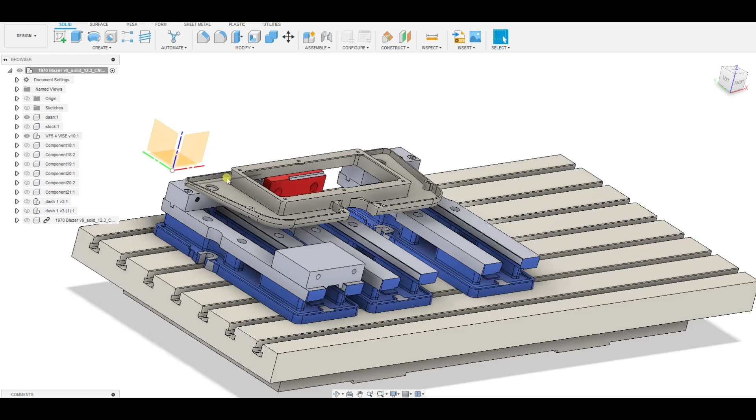Okay, so here we have our C10 dashboard. This is going to be made for the billet version of Reversion Raceworks C10 dashboard that they normally 3D print. So we're going to go through some basic stuff on how I have it fixtured and some of the methods for tooling and operations for cutting this out.

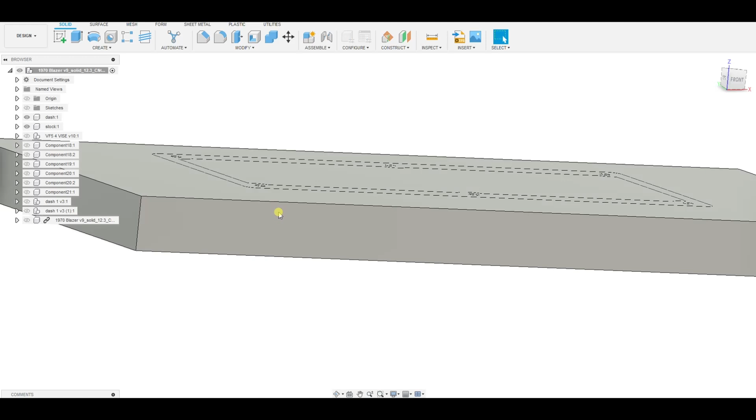For the first operation, obviously here I have it flipped. But you can see here, I have a couple of variations because it actually made it easier to machine, and I'll go over that. But let's get the basic setup out of the way. Stock, 1.5" by 10 by 23 inches is the raw stock, and I have the model positioned, I think it's about 40 thou underneath the surface there. We have just enough raw material to make this work without going to a bigger size.

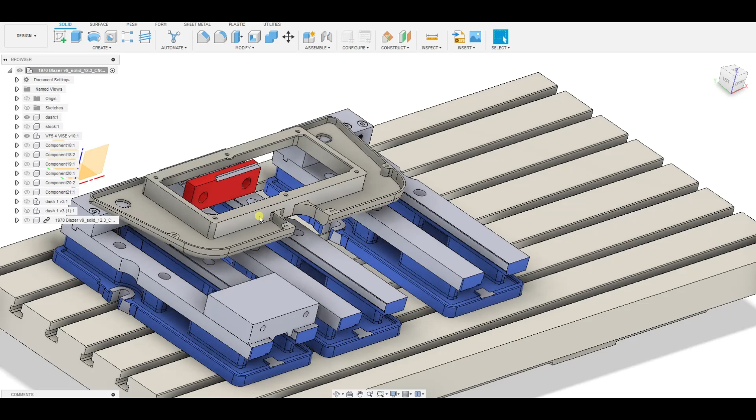For first operation, I'm actually going to be machining out this end first. And the reason I do that is because then I can grab the backside to where the Holley dash sits in. Now, if you don't know, this C10 dash is to hold a Holley 12.3-inch Pro dash. That's what it's designed for. And you have your lights, I believe, lights and wiper controls, factory control locations there. So if you don't know, it is for a Holley Pro dash.

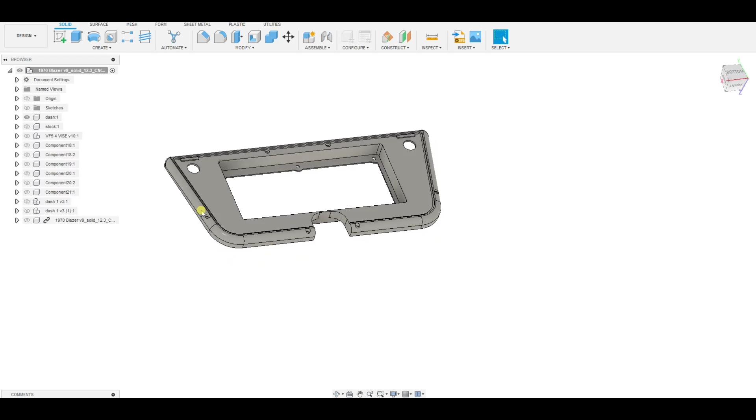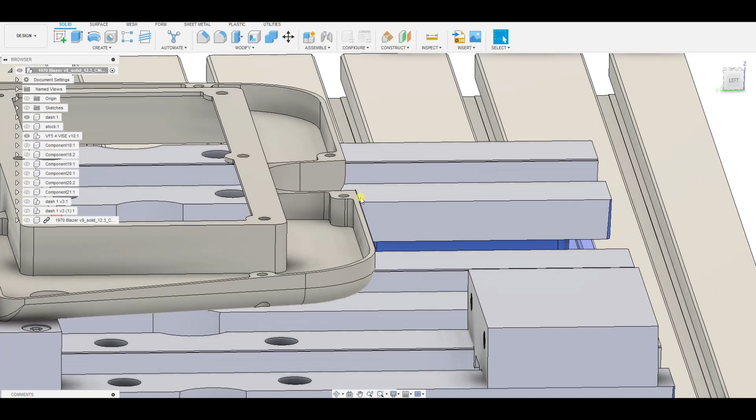As you'll notice, the profile, the angle here. In a 3-axis machine, it is kind of a large part. It was difficult to achieve that to a level that is acceptable. And of course, everybody's interpretation of acceptable varies, right? However, this part specifically is going against the OEM dash part. I think it's a 2-piece dash for these trucks. But anyway.

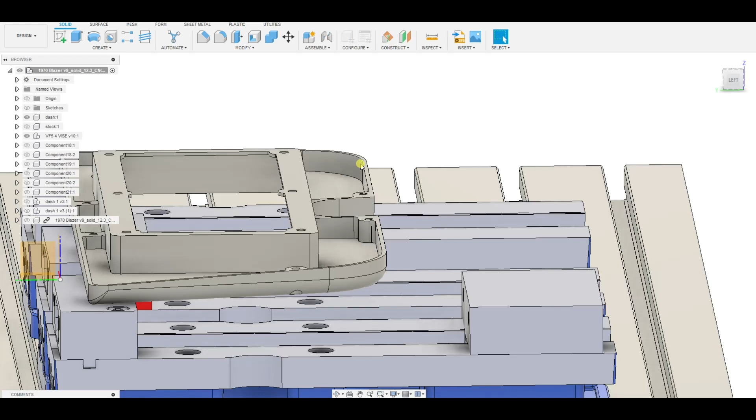And I'll show you what I did there. It was actually kind of like a scallop with a ball end mill. And it was the easiest way to achieve a consistent flatness, if you will, or consistency for it meeting up against the OEM part of the truck dash. You could see these are on an angle here. So it was a little difficult to get into that corner, but I managed to achieve that. And again, a lot of this stuff isn't going to be seen.

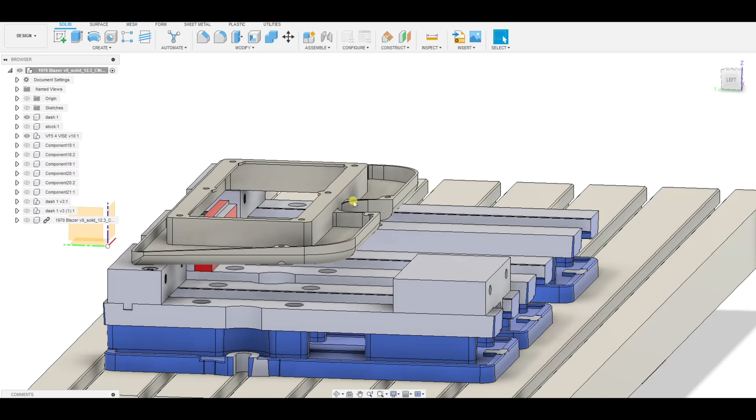Being a billet dash, there should be steps taken to make every area, as a CNC machinist, as best as possible with what you're given. And it is difficult, but it is achievable. And obviously, to have something that's at an angle tighter than 90 degrees, it's just really not going to happen for a 3-axis machine. And I would imagine probably a little difficult on a 4-axis. You're really not going to get in there.

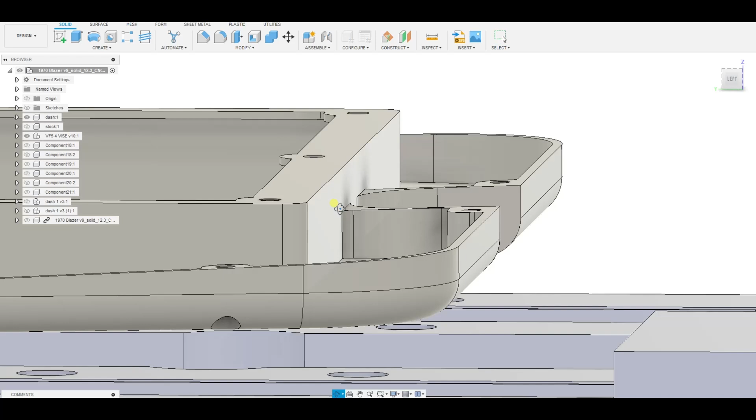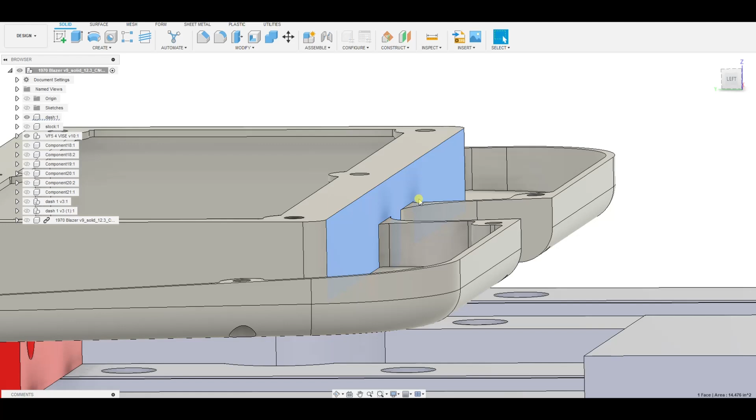Obviously, the best way to do this is a radius. I assume that feature is the way it is from this surface to this surface here. But anyway, I did achieve that just by doing steps to a point, which again I'll get into, by running a contour feature. And I can't say for certain what it left, but it's not that noticeable. And again, this feature is hidden. You can't see this. This is the back side of the dash.

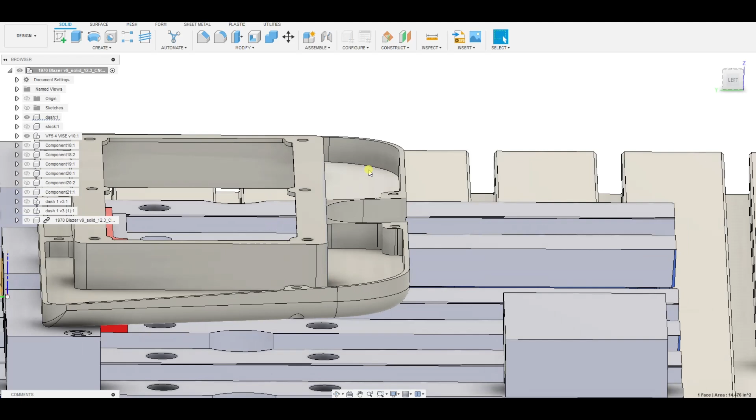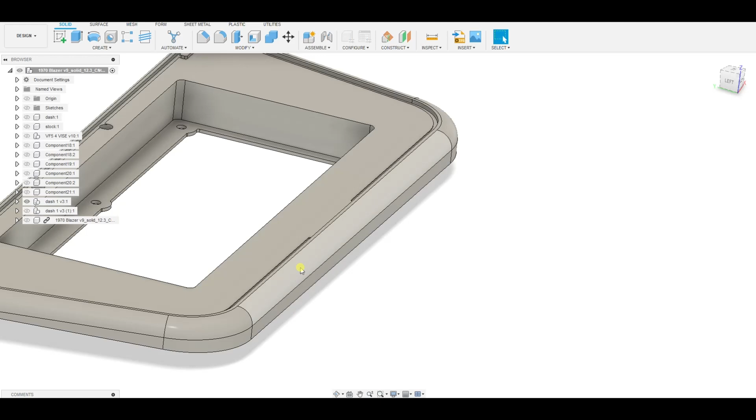So real quick, I wanted to go over the different versions I have of this dash and the reasons why. Here you can see I eliminated the holes here and I eliminated the steering column cutout there. And I did that to make the features stand out a whole lot easier to be able to machine this surface. Now, in a previous video, I had talked about ball end mills and corner radius end mills to achieve this.

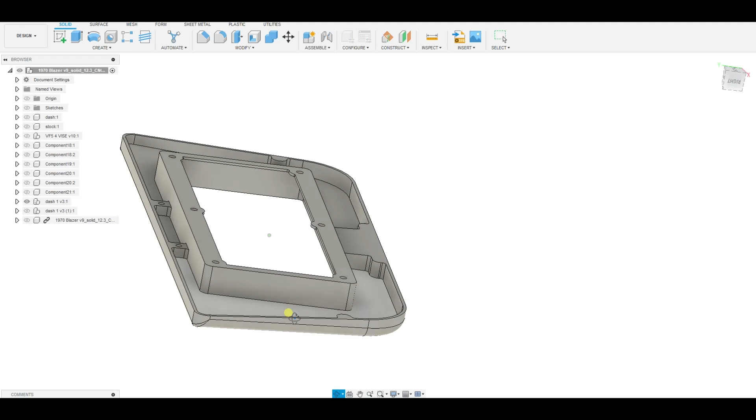So what you're going to see here is the actual machining of this whole top feature here. I do have some basic B-roll of machining this side. Not really the focus of it, but you'll see every bit of this machining, and then I'm going to step back in and we'll focus on machining these surfaces here, which are kind of difficult.

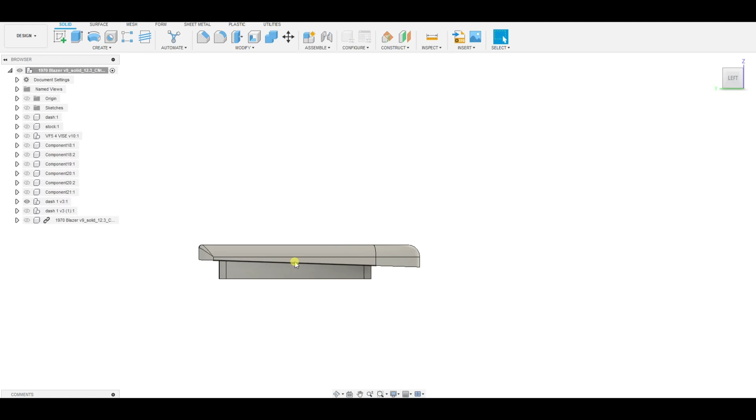But the face of this dash is parallel to here. You just have this angle here. I forgot what that is. I think it's 1.8 degrees, looks like 2 degrees.

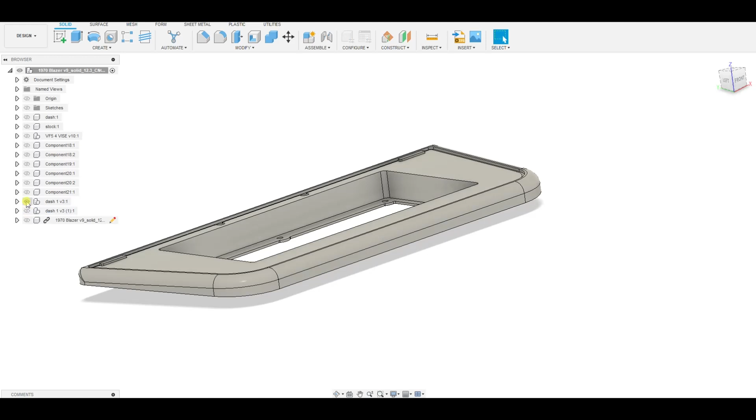Okay, so let me see what this other dash is. I forgot what this one was. Okay, this was just a version where there's no holes for the headlight and the wiper switches. So we got that. So let's go back up to this variation of the dash, and we'll go over to the manufacture space here.

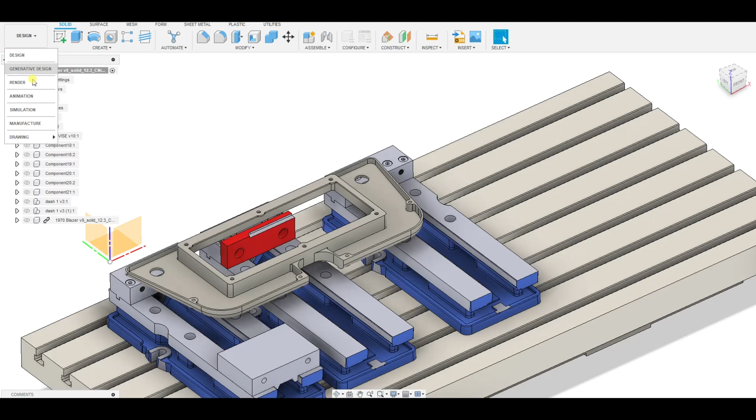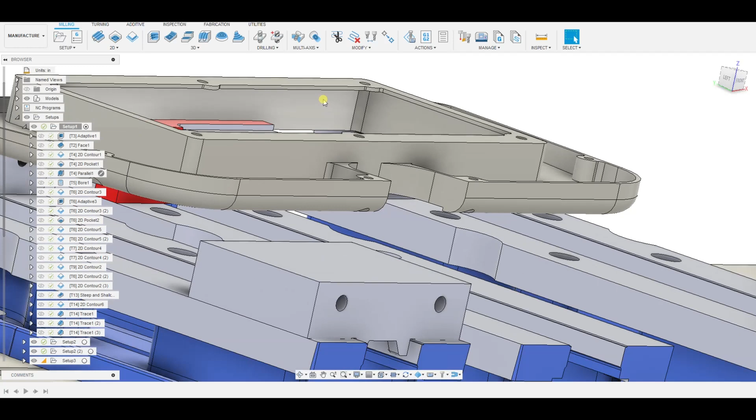So here for our setup one, we're doing an adaptive, obviously. We're roughing all the way down. And what you'll notice too is in this part, it is stepped back pretty significantly.

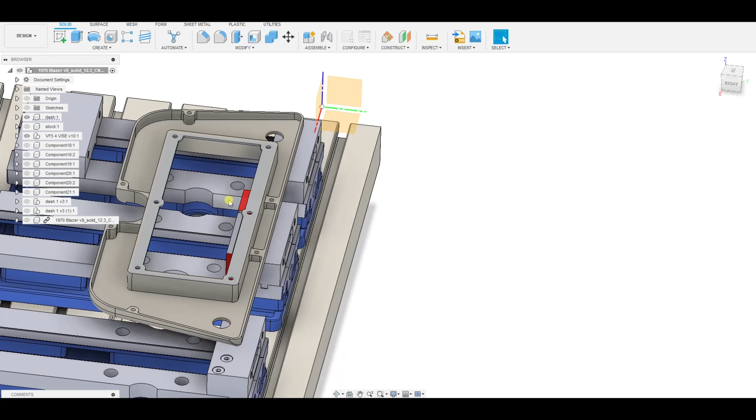So you have this ledge here for the Holley dash to sit on. Well, when we're machining it in this orientation, you can't get into there. That benefits us when we go to flip this part over and grab it in between this surface and this surface here. When we grab it in between those surfaces, we have a whole lot more strength.

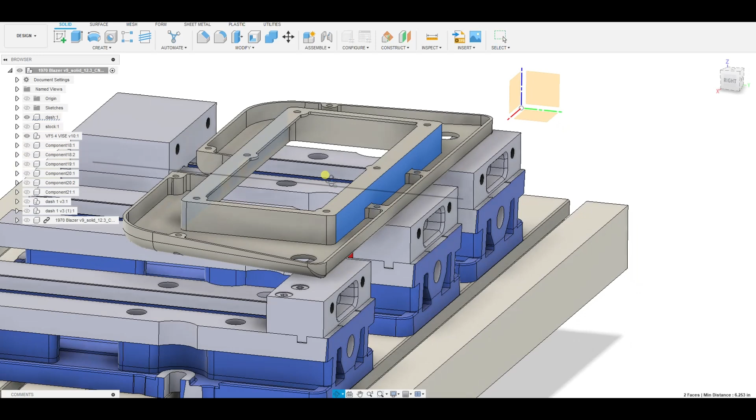One of the last features is to machine the inside of this pocket when this whole part is flipped. When we go to machine that, we very slowly walk down it, and we were careful to check the torque on the vise so that we're not crushing that part.

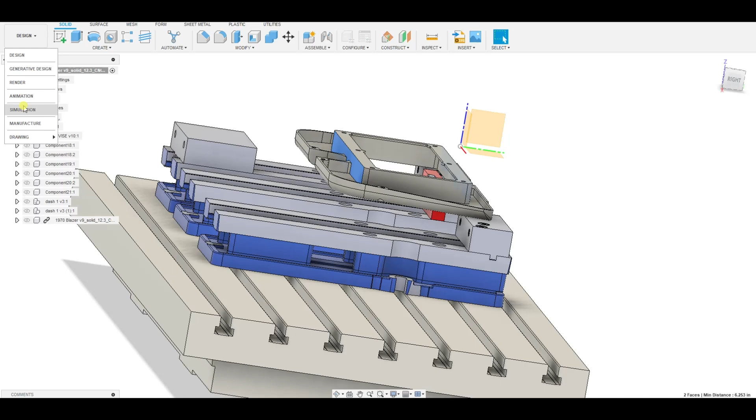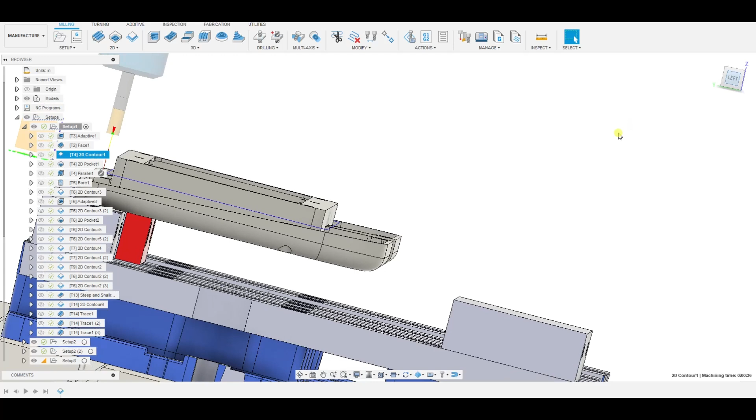Let's go back over to the manufacture space. All right, we have a general face mill, 45-degree shell mill. I'm coming around here, looks like I'm doing a pass here. Now when we run this pass, you can see that's not the final pass for this feature.

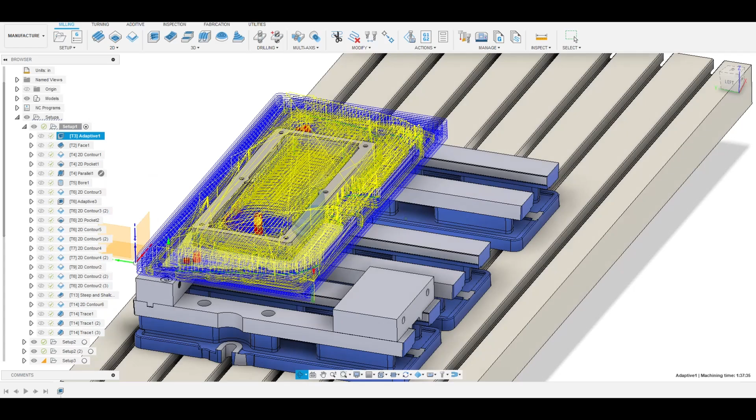So now we're getting into a pocket. Our tool 3 here is our 1/2-inch 4 flute from our Maritool catalog, and that is just eating chips. Our face, like I said, is a shell mill, and then our number 4 tool is our 3/8 3 flute, kind of a finishing / medium roughing tool, and we're finishing the pocket in here.

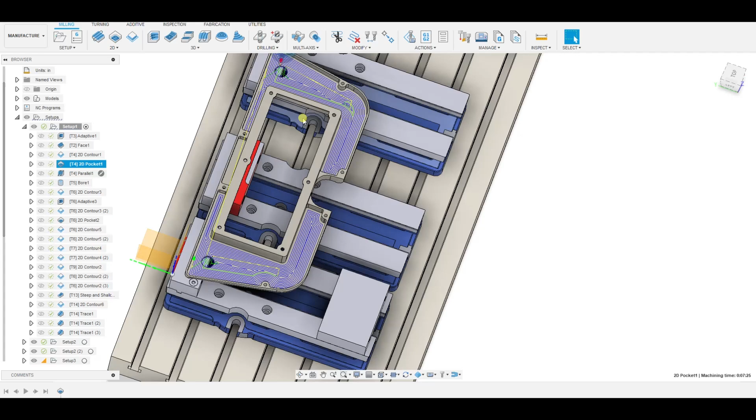Parallel, I'm kind of roughing this down. Now the adaptive with our 1/2-inch tool is leaving 30 thou, so I'm just taking a little bit of the bulk off of this. And as you can see here, we're going to get pretty close to this wall, and this is going to help us finish off.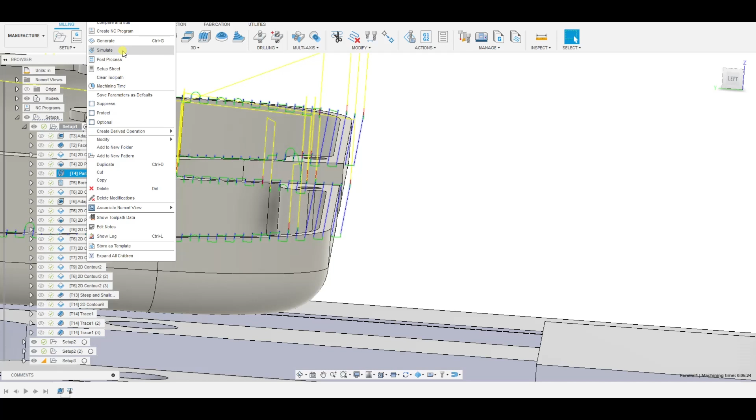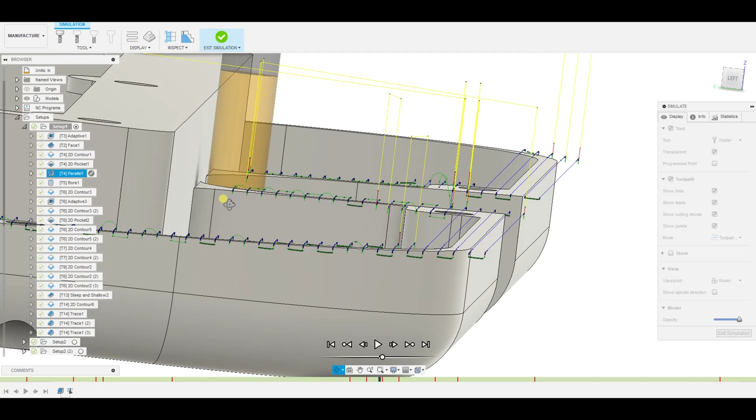Let's see if I can catch it here. I don't know if that's the last. Let me just go all the way to the end here. Okay, so it is. So we're getting pretty close there, but there's also one more feature that we do. But this roughs it down and gets that surface prepared.

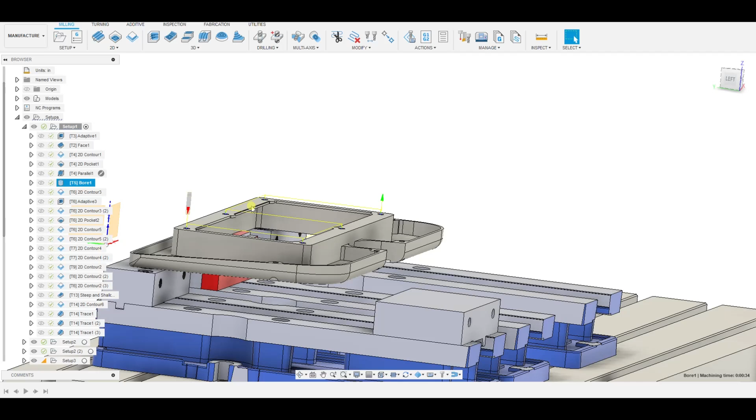Bores, we're doing the 6 bolt holes here that hold the Holley dash down. Tool 5 is a 3/16 3 flute. Tool 6 is our 1/4 inch, and these are all long reach reduced shank tooling. This is just going down, doing our contour. Yeah, it's 2D contour, just makes it easier.

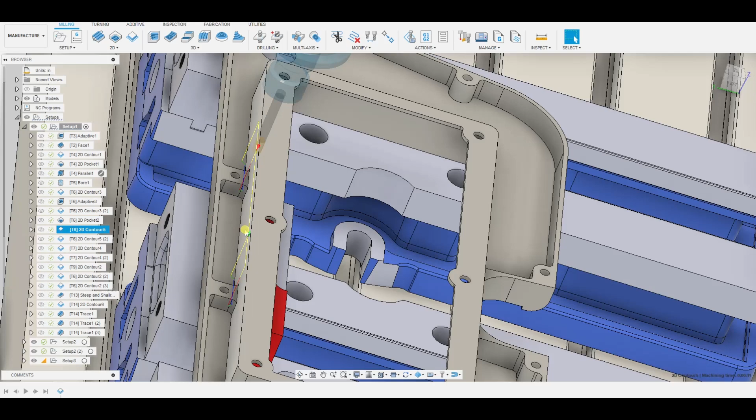Next, we're going to come in here and adapt this down. Same tool, this is a 1/4 inch 3 flute. We're going to do a contour, and then a pocket. Here it's a little easier, so we're actually cleaning up this contour feature. Again, this tool, our number 6, comes pretty close, so it does clean it up pretty well.

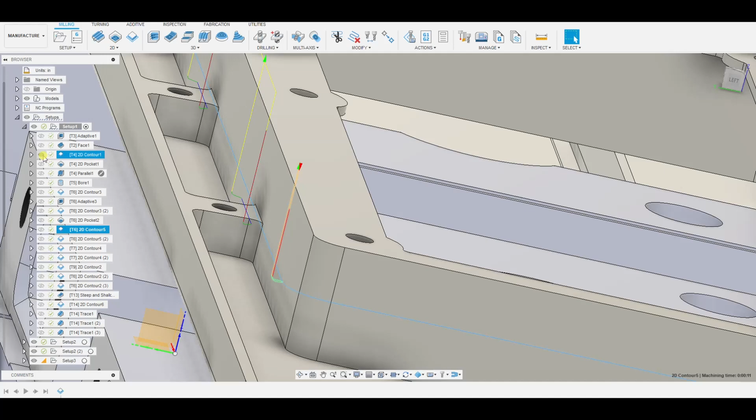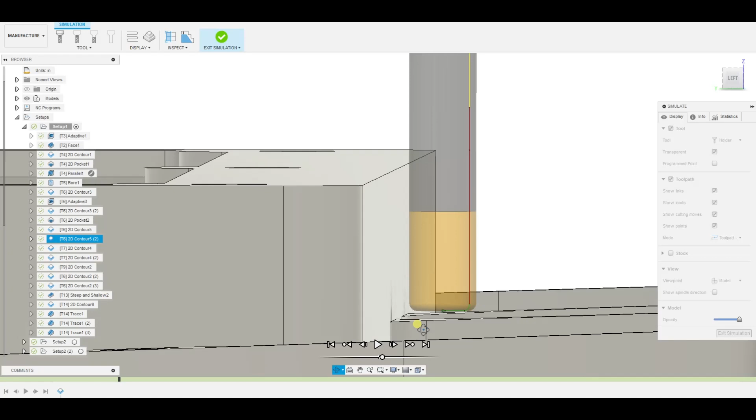Okay, so here we have another contour feature, and we're just coming right up to it. You can see here, we're just leaving that little bit there. It doesn't affect anything, so I'm not too concerned about it. You could get a smaller tool in there and step it down, of course.

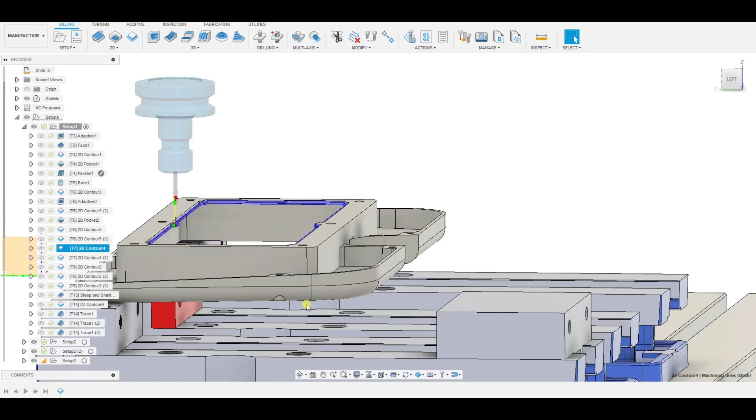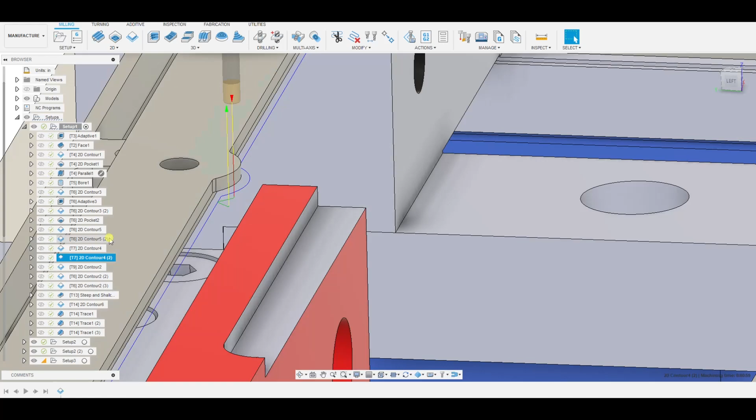That's obviously an option. Tool 7 is our 1/8 inch 3 flute. We're just doing the finish contour in here. We're taking it easy because we roughed it with a 1/4 inch tool, so more of just a final finishing, a little light on the step down. We're not going too crazy on that. And then we're just doing one finish pass. I guess we're leaving stock here as much as I can remember.

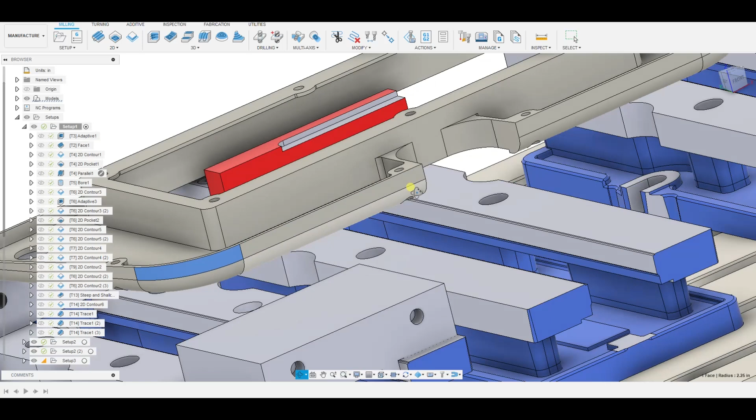Tool 9 is a Niagara A345 with a 2-inch flute. It's a great tool. We're now coming up and cleaning up the majority of these surfaces. It's going to follow the simple contour line and just wrap around and clean everything up.

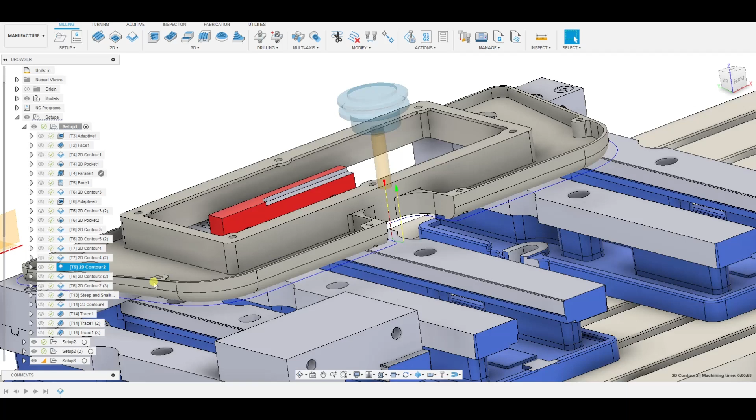I ran this again because for this one dash, tool number 9 was beat up and I wasn't happy with the finish. And then here, this section sticks out a little lower, this little tiny corner there. So I had to get that so that when we flip it, we don't have to come back and match it to the remaining surfaces. So we do that real quick.

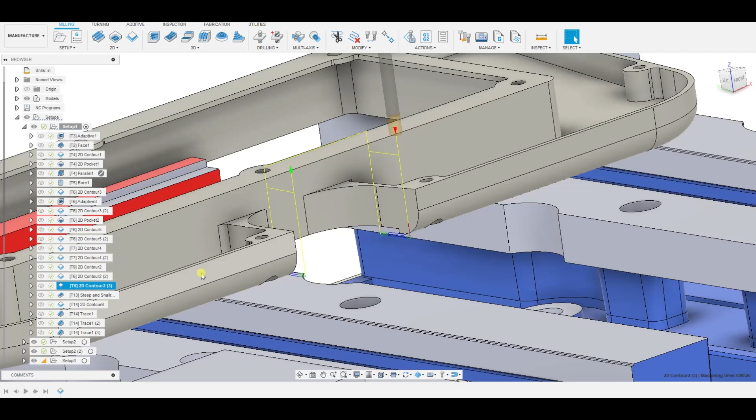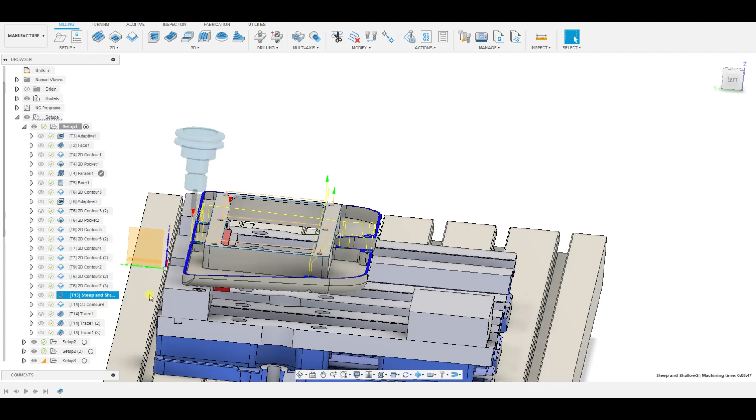Okay, so here's the steep and shallow operation in Fusion 360. It works great, it's pretty quick, it's just peace of mind. I really tried many different variations of programming to ensure that we have a consistent finish. And in all honesty, it kind of looks like real fine 3D printing. But again, it really doesn't matter.

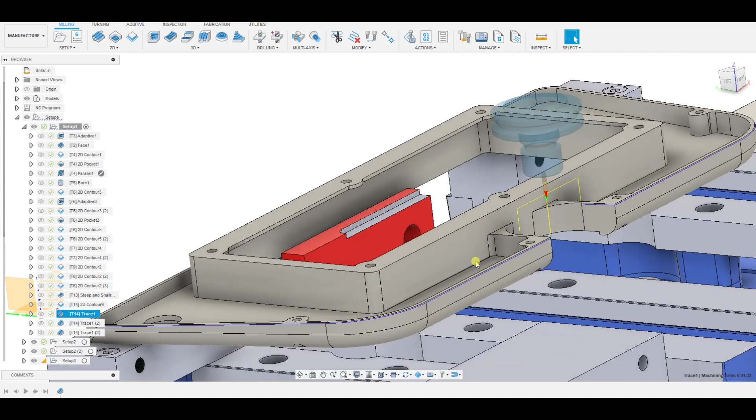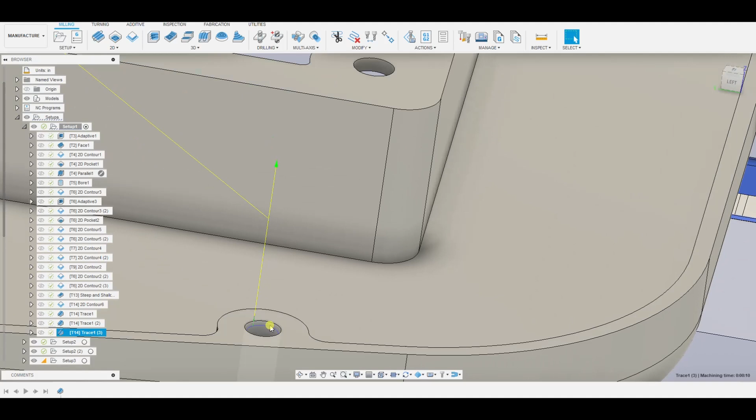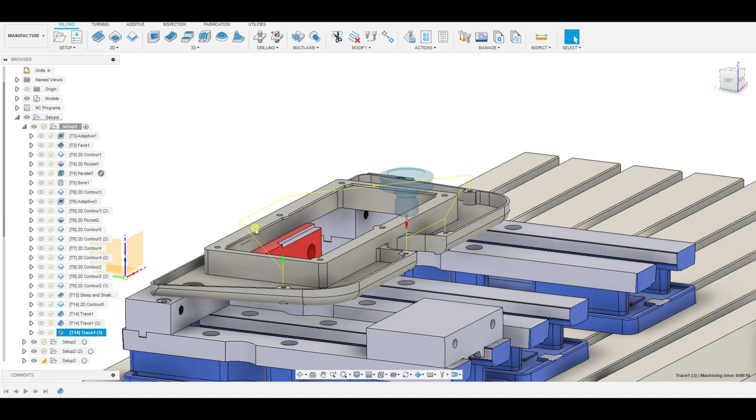We're just trying to get what we can and do the insides within our reach, and we're doing the holes. These holes aren't drilled yet, they get drilled from the top side. But we want to do as little as possible later, so we're doing the chamfers on the back sides, so when it does bore the hole, it's relatively done. All right, so that's it for op 1. It gets taken out, cleaned up, and ready for op 2.